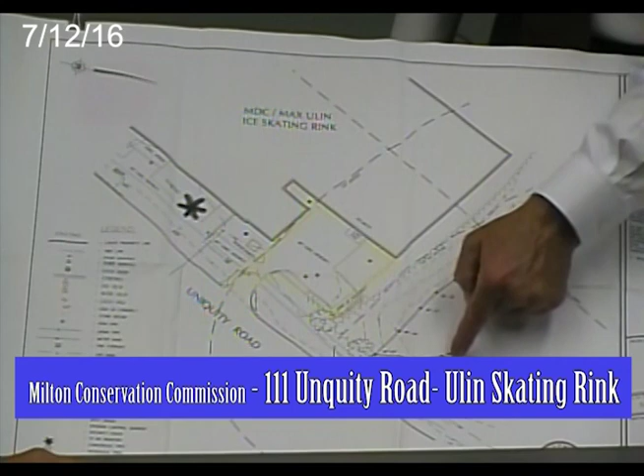What's the plan for not having the same thing happen to the boulders? Because what we're trying to avoid is just dumping beyond this riprap. I've been in front of you several times through the years, and if I tell you that's what we're gonna do,

I'm pretty comfortable that you would say, yep, Bob told us that's what he's gonna do. However, I agree with that—I cannot speak for the next manager. So we can put the boulders there, and I can tell you that the snow will not go beyond those boulders while we manage the rink. We have a one-year permit that ends on April 30th of '17. We're in negotiations with the town and the DCR for a long-term permit. So I can tell you from now until April what will happen. I cannot speak after that.

Well, let's just make it a condition: the snow does not go beyond the boulders. But the snow melts into the wetland anyway, doesn't it? It's going to go into the wetland one way or the other. So I don't see what the problem is exactly, if it's dumped directly or if it slowly melts in.

I'd be concerned about tire tracks in the wetland compacting the soil or something, but not the snow itself. I think originally and historically we had two problems. One is that the front-end loader was going way too far into the wetlands to dump, because they wanted to keep the 10 feet down to 6 feet, so they just kept pushing it further in. So that was a problem, getting the equipment in the wetlands.

Okay, you see how I can close that. Yeah. And the second issue is that—I think, Bob, you've done a good job using some kind of a dry well or melting box. At the end of the season, or twice a year when you scrape the ice, that is a problem, because we're getting paint and some chemicals. So in the past, the DCR would either melt it and take the remnants and put it outside, or they'd melt it and put it down the sewer.

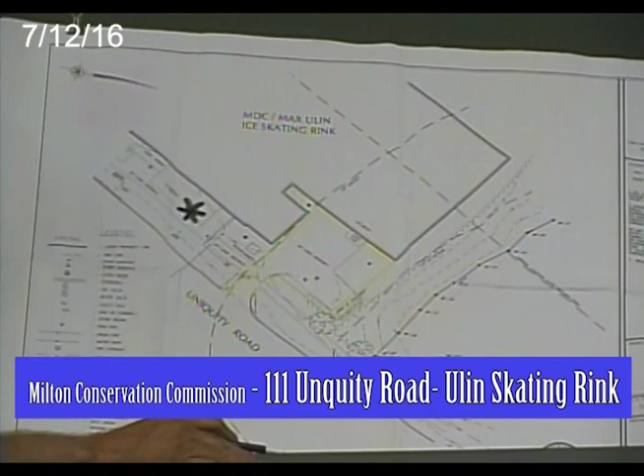Good, that's what I was looking for. When was this flagged? What's the date on this? Lenore White did it within the last, I think 3-4 weeks ago at the most. Okay, it was maybe 10 days before we saw it on the 2nd of July - yeah, those are new flags, so within the month.

All right, are there any other questions from commissioners? So this would continue then with a revised plan submitted showing the boulders, riprap, everything on the plan. Yeah, we would need that, but we could take a vote contingent upon submission of that. She did it on June 22.

June 22. All right. Other questions from abutters or members of the public? So I would entertain a motion, and this is a request for determination of applicability, and I think we

can issue a negative determination based upon that line and all of the contingencies. One of the contingencies I would like to include in a negative determination is to have a spill response plan for the Zamboni.

What the plan would include would be something you probably already do, and that would be having Speedi-Dry on site, some kind of mechanism to protect it. If there is a hydraulic compromise and the Zamboni's out there, we want to be able to stop whatever's leaking right away. We have a verbal plan, we don't have a written plan, but we can put that together very quickly.

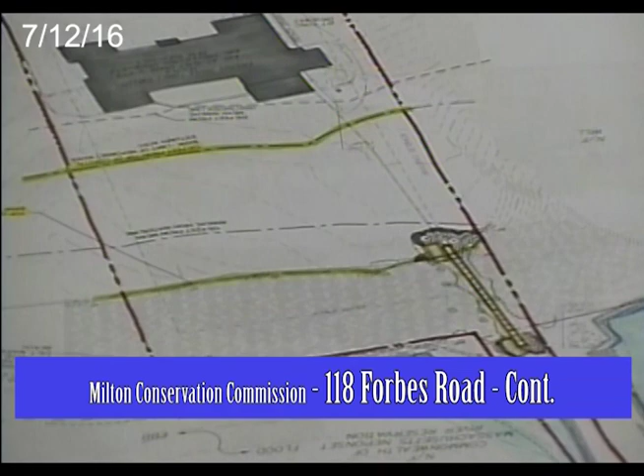Well, we were talking about leaving the vegetation there and not touching it so that it would be hidden. But now I'm concerned that we are limited - you can't move it. Hold on now. 'Cause I appreciated what you said to Judith about that - if you're moving it to the right as you're looking down, or to the south, in order to create that buffer of trees and foliage, I think you're going to pinch onto the DCR land. I had no idea that DCR had that land.

Well, honestly, I think this map is a little in error as far as the actual boundary line. I think this is much more accurate. Well, the problem with that, and I was going to say this to you, Bob, is that doesn't show that land. I see where the line is. No, I see where the line is, but I thought the blue was the water. But that's DCR's corner, right there. It is, but to me this is in the Neponset River, and this is all pretty blue. I thought that was water.

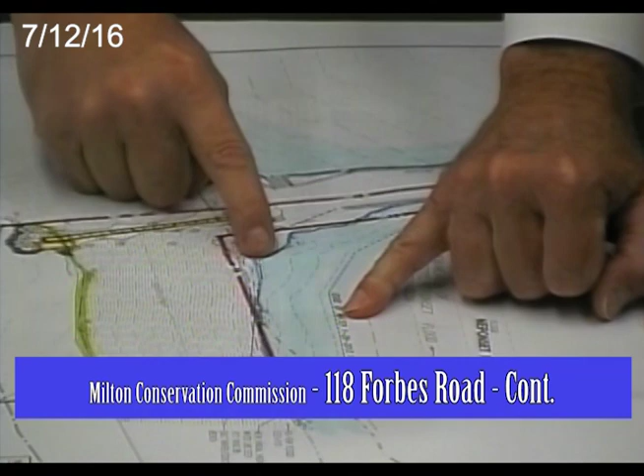Now, I granted, well, it says edge of water here. It floods to that line. It may flood to that, but it doesn't look like it's high mean water, and our measurements come off of high mean water, right? Yes, but did you stand on these stairs? Yeah, you can see that those get wet. Oh sure, yeah, but that's not what I'm talking about. What I'm talking about is this angle here - I thought it was pointed more over here, to the very edge.

In fact, we were looking here, and we were talking about having that buried so it went below grade. But this is the section I'm concerned with, that there's a buffer here, and I don't know if you've got enough swing to do that. Well, I agree with you. We're kind of tied into where we want to lay this out, and we flip-flopped the landings on either side. But we don't have a lot of play with regards to where this can go, or how the angle can go, because that's our width.

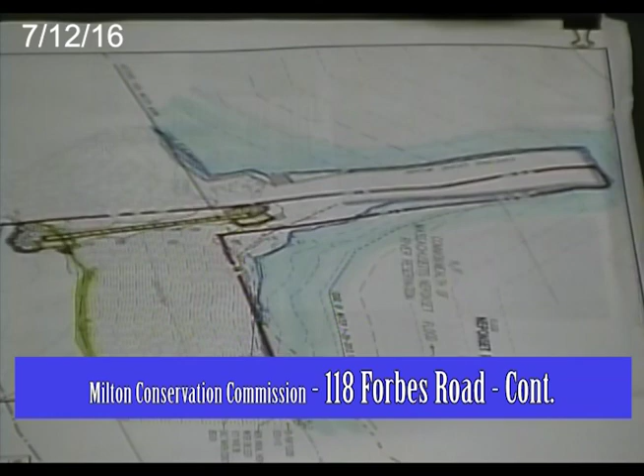I had no idea. I thought the DCR land stopped there, where my thumb is. Okay, and I had no idea that's a real pinch point.

My concern is, and I appreciate, Jim, what you said about an individual's right to use their land in conformance with the regs. It's a good point. I think we've got a pretty good track record for respecting property owners' development of land. But I'm just hung up on what DCR's reaction to this is.

I assume that the abutters were notified. If I might make a comment, Eric Galley, I'm the project manager, landscape architect, and planner.

I think the mapping with the aerial, because of the curvature of the earth and other reasons, the lines are approximate, but the pinch point may be unnecessarily emphasized. The drawing in front of you is the survey done, so the width shown on that plan, we can fit the lift in the space available, and we're able to actually leave 10 or 15 feet of vegetation to the west, with Boston being north off the tip of the jetty. So there is space to maintain the existing vegetation, and we talked about that day in the field, augmenting that vegetation with additional evergreen plantings and so on. So the map may be a little bit misleading in terms of the geometry.

Yes, DCR is the majority of the frontage, that's correct. The pinch point, though, is accurately shown in your plan set and on the survey here as well. So we can fit the lift through there.

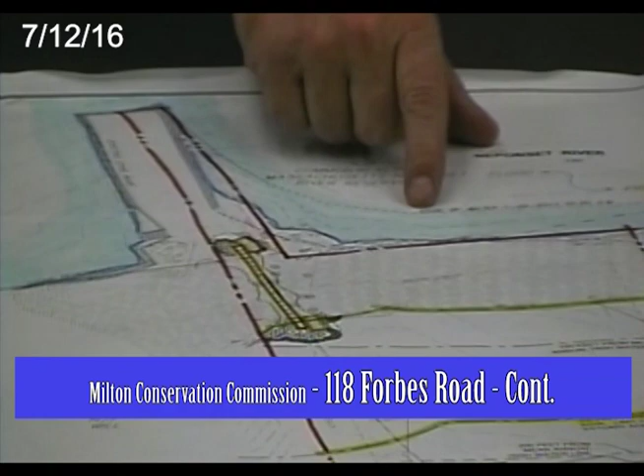That's what I thought, because it looks like the blue is water. It's not. Is that intertidal? No. So right here, that swath - is that all DCR? I think so. But just point to the water - the height and trees. What does that say, the edge of the water?

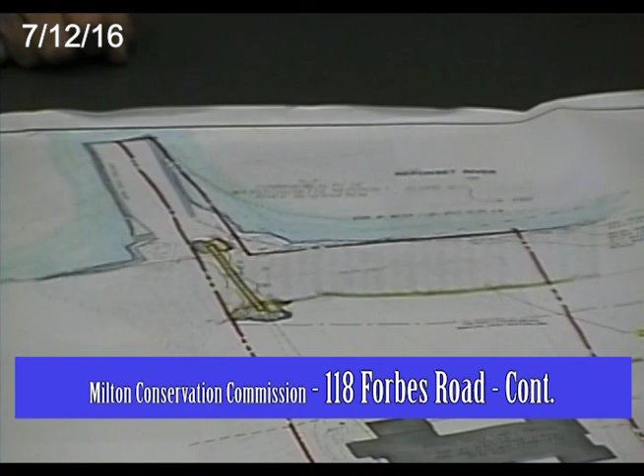Like I say, at high tide it's all the way up here. What is high tide at 10 a.m.? I asked them to get me edge of water, and they just picked it. That doesn't mean anything - the tide comes in and goes out. Come on, that's the water edge. The blue is the limit of the high tide on January 29, 2013. Is that high tide or low tide on that map?

You have from one side to the other, almost going in a straight line, when in fact the property ends here, and then it juts out beyond the real property. So that's very misleading.

This is accurate, actually correct, according to Judith. Well, this is misleading - these GIS maps have caveats associated with them. This would be far more reliable than the GIS map. This is a survey, because I've used them under other circumstances and they won't hold up. The precision of the drawing is more precise than the satellite photo. You can't use those with deeds, et cetera.

I like this one because it shows north going that way - I think that's the high tide line. I'm sure it is. I'm not sure that's authentic either. If you like, we can go out and shoot high tide.

No, I'm just hung up on the pinch point. But they're saying the pinch point's 26 feet. That's not when we're talking about the rails on the lift - those are about 48 inches apart. Right, and John, from what I saw, it's not as tight as it appears on the GIS map. Oh, sorry, it was 8. The rails are about 48 inches apart.

Right, and then you needed a couple feet on each side. Right, particularly if you were to stick your arm out as you were going up and down, they like to have some clearance to any adjacent objects. What was the overall width of the path? We were looking for 10 feet, but there were a couple of trees we're trying to save within that. Right, that's an issue with code enforcement, to make sure the building inspector is comfortable with those clearances being a little bit less than 10.

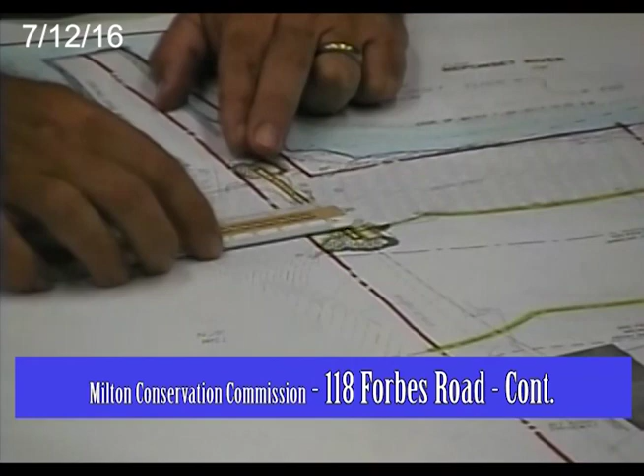At the minimal point, at the pinch point, it gets down to about 10 feet at the very bottom. It might be 15 - we can look at your scale again. 15 at the top. I think there's a couple other spots - based on the drawing that were submitted to you, at the bottom maybe that's more like 6 or 7, and at the top it's a little over 10.

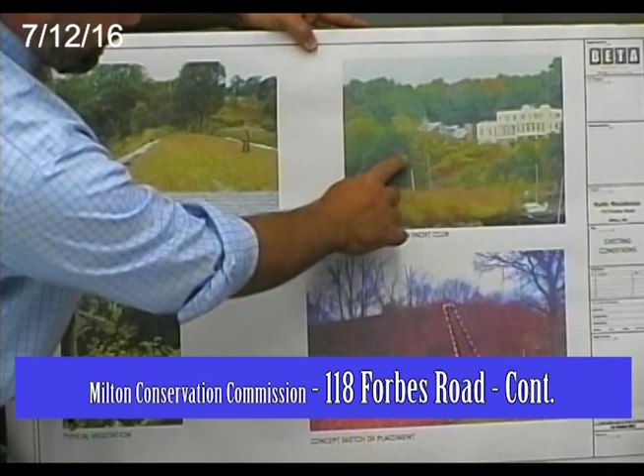One of the things I wanted to mention is, as much as you can look at it in plan view - I think this is a view of the hillside - you can see here's the big oak that everyone stood over, and you can see this line, this is sumac, staghorn sumac in here. So there's a line of vegetation that's naturally creating a buffer, keeping in mind these tracks are relatively low to the ground.

And when the carriage is either at the top or the bottom, it's rarely in transit. So with the sumac being that vegetated line, that was the piece we were looking at to maintain as much as possible in place for that buffer.

This was a shot we took in the fall, where we thought the lift would be going. To the far right you can see the oak tree, the approximate location of the lift, and the vegetation we're looking to keep. Somewhere through the middle here is the property line. Again, if we want to go back to the site, you can look at those stakes and see exactly what those widths feel like.

But John, I think the idea that we're talking about hiding the tramway says that we value the beauty that exists currently. The view looking is something along those lines, it's part of the aesthetics that we protect, that's true. Exactly, but that's the only reason I'm hung up on that.

I understand what you're trying to do with hiding it, I just want to make sure you've got enough land to do it. Right. And also we discussed the painting code for it. It would not be steel, it would be colored. I think he's going to show two color combinations that were recommended.

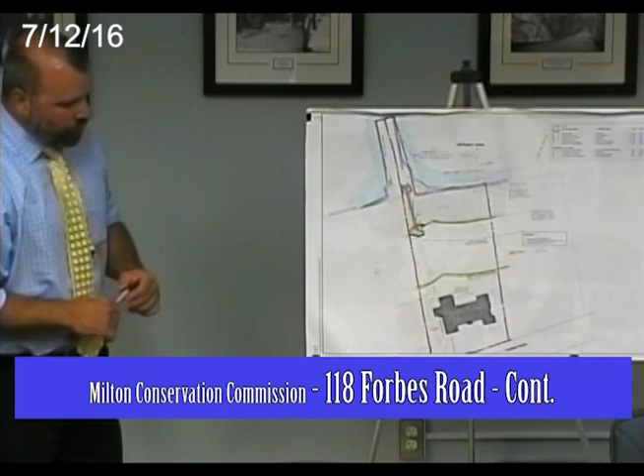If Mr. Will were to sell to somebody else - oh, I understand that - there's no right to traverse that property in order to get to the dock. So the dock would essentially be inaccessible except by boat.

Any other questions from commissioners? Other abutters, members of the public that have a question or comment?

Kathy, did DEP come in with any comments? It's still under review. Well, I would certainly like to hear DEP's comments on this. And DCR was notified, you say they're notified? Yes, they are, and they haven't said anything. Is there any way to expedite a DEP comment? Not that I'm aware of, they go on Eastern DEP time.

All right, the engineer has some other graphics they'd like to show. Sure, landscape architect, but that's okay.

I wanted to just refamiliarize us with the system. So the idea is that these posts are driven into the ground. This rail system is attached to it, and then the trolley, the carriage, is winched up and down that system. It's about 4 feet apart, and the posts also have diagonal bracing.

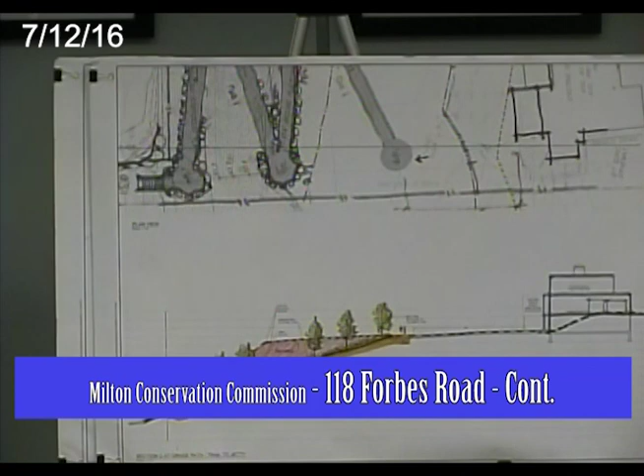Because the existing slope is so steep, today that existing slope is this line here. It's essentially a 2 to 1 slope, or even slightly steeper than that.

So in order to get a more gradual path, we thought we could naturalize it and do a pretty nice job creating some habitat along the way. But in terms of square footage of impact, it became rather substantial.

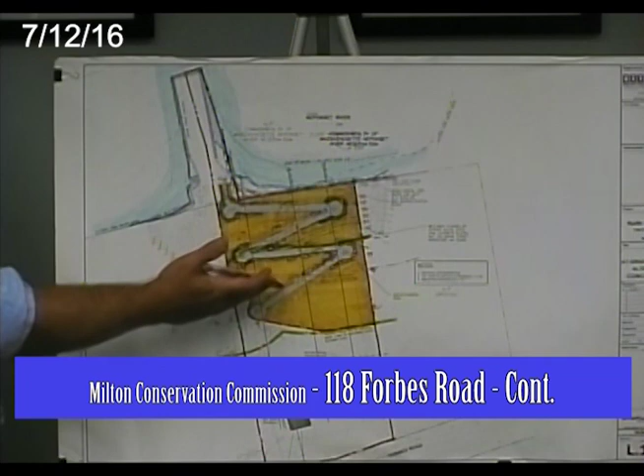An alternative we didn't study in great detail was the creation of a stair, which we talked about on site, coming down. Because of the grade change, it would be something on the order of 80 or 90 risers with a series of landings. That would be a very substantial and cumbersome structure, both invasive to the bank for footings and foundations, and visually very impactful with over 80 risers.

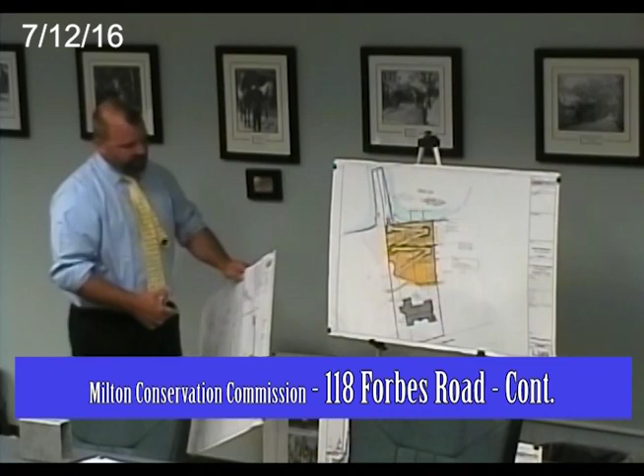I brought these along because I wanted you to see some of the other alternatives that were looked at. And then, of course, the final solution we came to - this is a zoomed-in version showing the 26 feet of width, the rail system coming through the upper and lower platforms. I also wanted to highlight there's an electrical connection from the house to the motor at the top, and a disconnect panel there. That's the storyboards anyway.

I need to comment that the alternatives you're showing us are not viable alternatives - none of those would be considered. No one's going to permit you to take all that soil from the side of the bank. So I think those are highly hypothetical alternatives to the project you're showing.

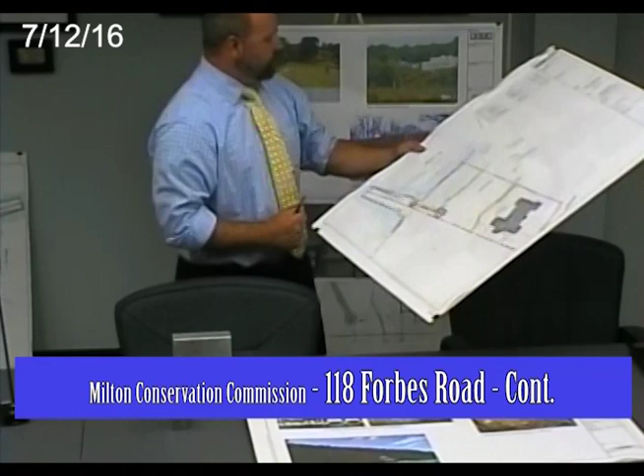All right, I don't want to prolong it. If it's acceptable to you, I'd be much more comfortable if I had DEP's comments. Is that acceptable to continue? That's acceptable, and we believe this is a proper exercise of the homeowner's right to access the water, the dock, and it was done in a manner with minimum interruption or effect upon the coastal bank, and I think it's a reasonable application.

All right, any objections from commissioners to continuing this until August? I don't know if there's - I don't even know who our contact is. Rachel Freed is no longer there? No, is she still there? No, she's the director now. She would be a really good contact, right?

Well, I'm just wondering if we can expedite some kind of comment from them so we can address this in August. I'll certainly rattle the cage a little bit at DCR. Do you want to comment? Yes, both.

That'll be helpful. All right, so if there are no other comments, questions, suggestions, or objections - did I ask the public for comments or questions or suggestions or criticisms? Whatever. So we'll continue this until August.